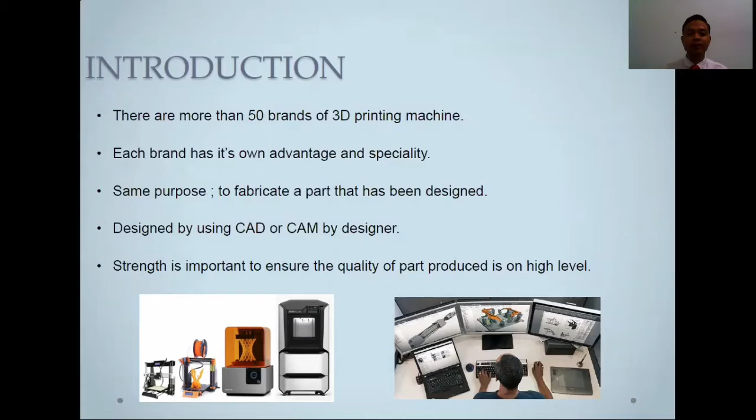Now, we go to the introduction. Nowadays, there are more than 50 brands of 3D printing machine worldwide. Each brand in the market has its own advantage and specialty developed. But all these machines were produced with the same purpose, which is to fabricate a part that has been designed using CAD or CAM software by the designer. So the product or part produced must have a good quality. Hence, they need to have a high level of product strength.

So, what is the problem? There are several low-cost 3D printer machines used in the FKP lab for education and producing prototypes. The problem statement for this project is the quality of the printed part varies from one printer to another. I have made a main hypothesis, which is there might be a slight difference between the strength of parts produced due to the layering technique, which also depends on the condition and capability of the machine. In addition, the quality of part produced depends on the setting of printing parameters, including several settings.

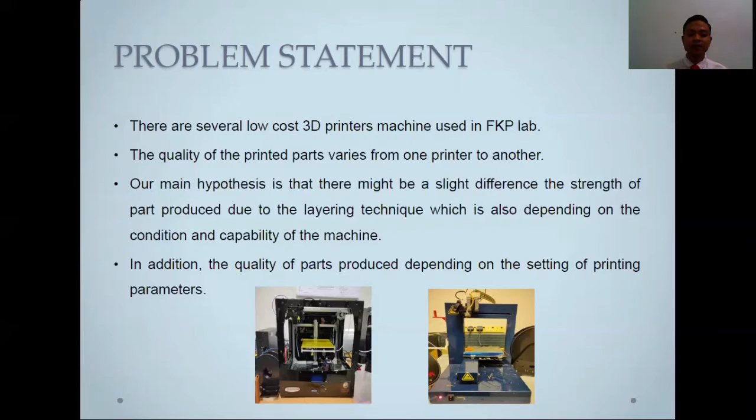So, each project needs to have an objective, what we want to achieve. The objective of this project is to compare the strength of 3D printed parts produced using different low-cost 3D printers and to study the microstructure of the fractured tensile specimen.

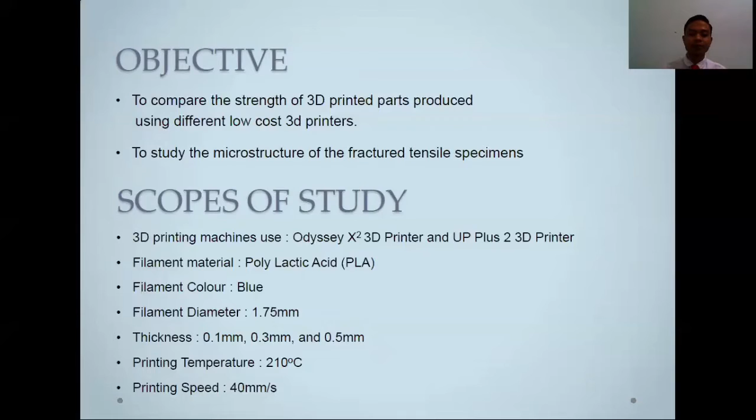Next is the scope of study that contains a few things. Firstly is the brand. The brands of 3D printing machine used are the Odyssey X2 3D printer and the UP Plus 2 3D printer. For the filament, the material is polylactic acid PLA that has 1.75 mm diameter and is blue in color. Then during the printing process, the layer thickness is 0.1 mm, 0.3 mm and 0.5 mm. Printing temperature is 210 degrees Celsius and printing speed is 40 mm per second.

Okay, next is the literature review. A number of literature reviews have been made to gather information to carry out this project. Firstly, recycled PLA filament has different strength compared to virgin PLA filament, and its strength will be reduced as the number of recycles increases. Then, layer thickness is one of the main parameters that play a pivotal role in object quality, including the strength, dimensional accuracy, and the surface finish. Next, Wenzheng Wu stated that the surface roughness of the specimen improves dramatically as the thickness of the printed layer improves.

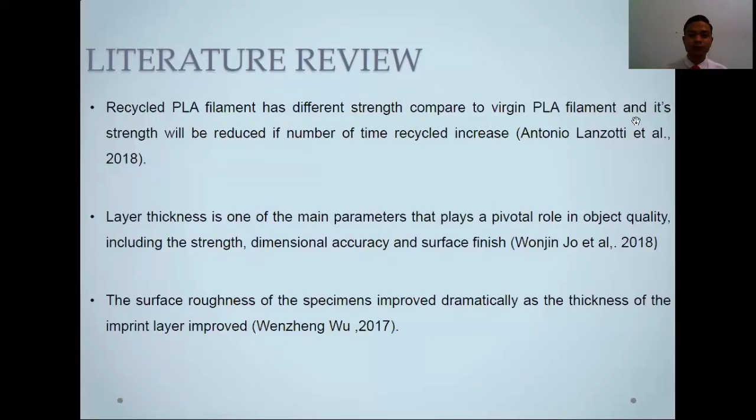Okay, now we go to the methodology of this project. As you can see here, I have stated the flowchart of my project, which consists of several steps starting from 3D virtual model by using CAD software, printing process, testing process, scanning process, and result analysis. The step done to achieve objective 1 is a tensile test, while to achieve objective 2 is a microstructure study. We go to the first main step.

The specimen used for this project is ASTM D638 type 1 dog bone. The dimension of the specimen, as you can see in the figure, follows its standard. We need to draw this specimen using CAD software, where I will use CATIA version 5 to develop it, then generate it into an STL file.

Next is the 3D printing process. The STL file generated will be inserted into the 3D printing machine software, which is Cura D3D 1.0.4. As I said earlier in the scope of my project, the filament used is PLA, and the layer thickness set during printing is 0.1, 0.3, and 0.5 millimeter. The UP Plus 2 3D printer machine has default printing temperature and speed, which are 210 degrees Celsius and 40 millimeter per second. So for the Odyssey X2 3D printer machine, we set the printing temperature and printing speed the same as the UP Plus 2 3D printer.

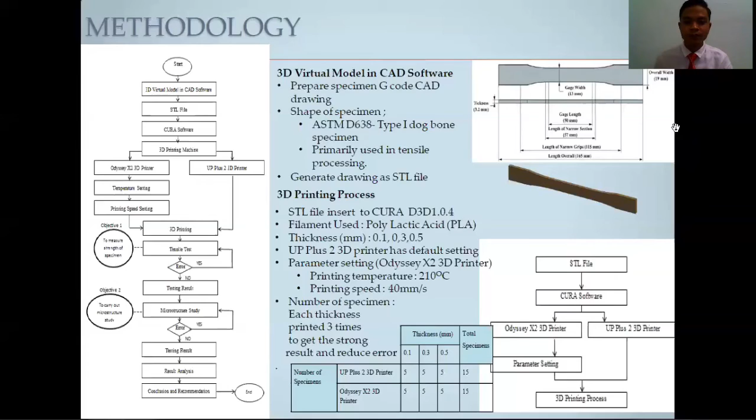Okay, now we proceed to the tensile test. The tensile test purpose is to determine the strength and characteristics of the specimen produced. The tensile test was carried out at 5 mm per minute speed, and the maximum load cell of the machine is 20 kN. The tensile test machine used is the Shimadzu Universal Testing Machine, located at the FKP Lab. The figure below on my slide shows how we will set up the specimen on the tensile test machine.

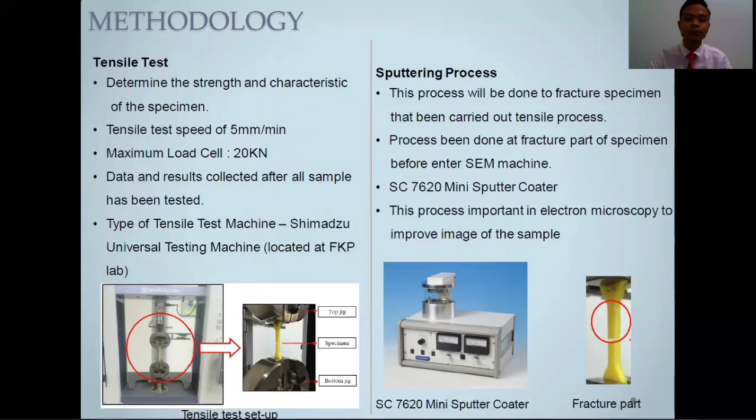Then we will proceed to the sputtering process. Sputtering will be done on the fractured specimens that have finished the tensile test, at the fracture part of the specimen. As you can see in the figure below, the fracture part is in the red circle. This process is important in electron microscopy to improve the image of the sample. The SC7620 mini sputter coater machine will be used for this process.

Okay, lastly, the microstructure study will be done using the scanning process. A scanning electron microscope, SEM, will be used for this process. An SEM scans a focused electron beam over a surface to create an image. The fracture surface images were captured using a Carl Zeiss Evo 50 at 10 kV accelerating voltage at 25 times and 50 times magnification power with secondary electrons.

The microstructure study purpose is to observe defects that depend on layer thickness. As you can see in the figure below is an example of a cross-sectional SEM image of the fracture surface from the tensile strength measurement.

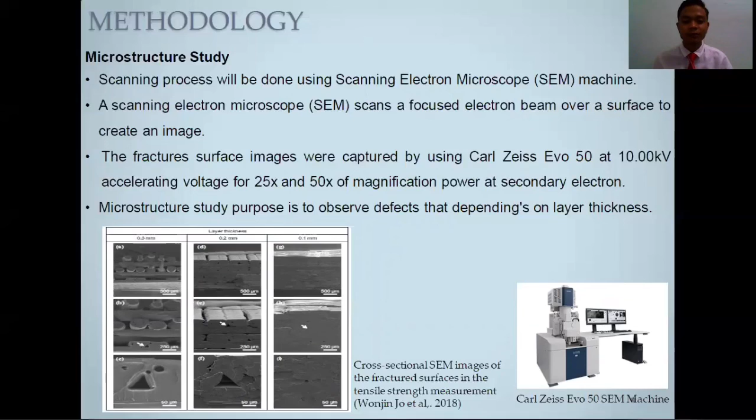In conclusion, layer thickness during the printing process will affect the strength of the part produced. It also affects the microstructure of the fracture part. All the procedures to carry out my project have been clearly understood after some research. Every detail required for each process has been found, collected and recorded. Some minor changes may occur because of unexpected technical errors. Then the experimental setup for all tests will be conducted during PSM2 with the appropriate procedure and apparatus.